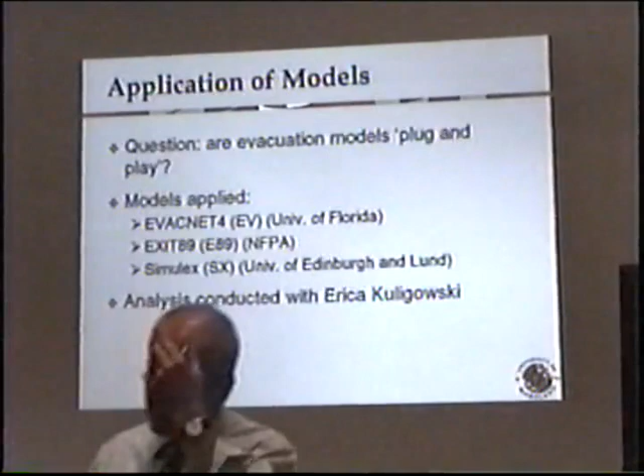What's it take to run these things? So we picked 3 models to run through this little exercise. We wanted to get a sense for, if you run these 3 models that are relatively popular in the evacuation modeling world that we had access to—that was an important constraint. We had access to them at the university with our very modest budget, so the free models were ones we liked a lot.

But otherwise, as you run these models, can you pretty much just run them with the default options, and for a generic, plain vanilla sort of building, get the same results? That was the interest we had. That's how it all started.

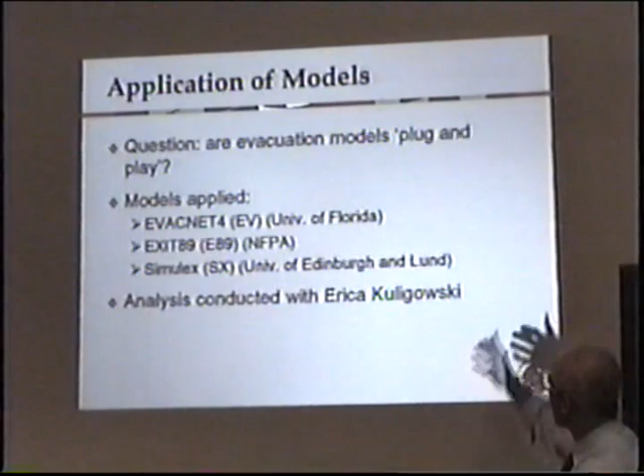The analysis—I'm talking about 'we,' and this is the faculty member talking about 'we,' meaning the grad student really did the work. I have to give her credit. Erica Kuligowski, she's at NIST—well, she's now at the University of Colorado pursuing a PhD, just finished her first year there, though she's kind of detailed from this to do that. So, with an interest in continuing in this area, basically.

We picked 3 models: EvacNet, this is the one developed with the NBS, at that time now NIST money, from the University of Florida.

EXIT89, it's a model that was developed at NFPA by Rita Fahy. The model's never seen the commercial world, I don't believe. It's still very much thought to be a research tool, as you talk to folks at NFPA, and they're very secretive about what their long-term ambitions are with this model. I'm not sure what their idea is. It's now been around for 17 years—it was developed in '89.

That's the name. And then Simulex is one of the models from the UK. There are 2 models from the UK that get a lot of press and discussion and coverage, Simulex being one of them. The other one, really the premier model I think at least in terms of capabilities, is called Exodus, or building Exodus if you apply it for buildings. I would love to apply this model, but that was well outside of our university budget to even touch.

So that was unfortunately not one we could deal with. So these are the 3 that we did. But let me give you a little background on each of these models, a little sense for what each of them does and how to work with them.

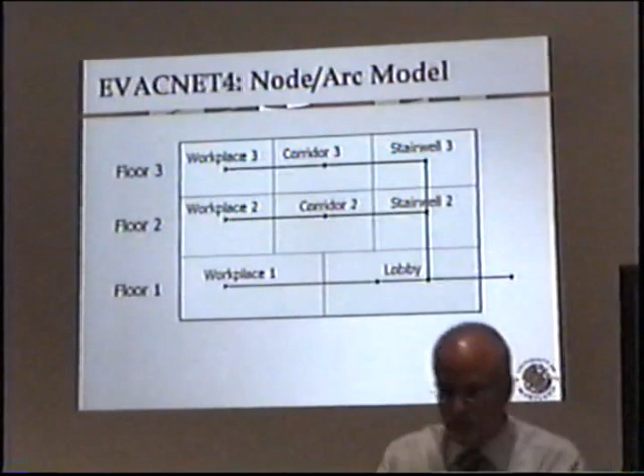We also came to appreciate the faculty don't have to be there either. For this class that just ended, we had 3 of the world's experts in life safety: Dave Purser, some of you know from the toxicity chapter in the SFPE handbook; John Bryan, one of the big names in human behavior; and Steve Gwynne, one of the principal developers of Building Exodus from the UK, though now in Denver. So 3 guys, one in Maryland, one in the UK, and one in Denver, teaching this class, with students principally all around North America.

About that, this is a node-arc sort of model, where you put a node in each space of interest where there may be people, and you connect the dots with arcs that are the pathways to get from one spot to another. It kind of looks like a sprinkler diagram in a way, and the mechanics of the science behind this is very similar to a sprinkler flow algorithm. In terms of getting the people, you're not going out the nodes, but people are starting at the nodes and ending down here at the exit—kind of a reverse flow of what you're used to in sprinklers.

You have some basic things to put in. You have to say for a particular node, how many people can you put in there—125, it says at the top of the door for this room, if this would be a node. How many people were there initially—32 or 3 of us, or whatever number we put in if we wanted to model this particular space. We also have to provide information about the arc, dealing with how wide that doorway is, mostly in terms of how many people can fit through it, and how long it takes to get from this node to a node out in the corridor. You have to go through some velocity calculations for that—how fast do people walk.

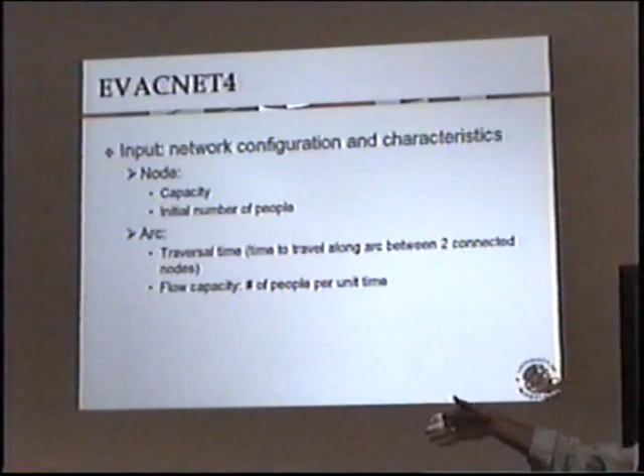Now, EvacNet, or EvacNet 4 in the current version, is an optimization model. An optimization model is something that either minimizes or maximizes something. There are a lot of optimization models used in engineering—not too many in fire, I guess, but a lot in engineering.

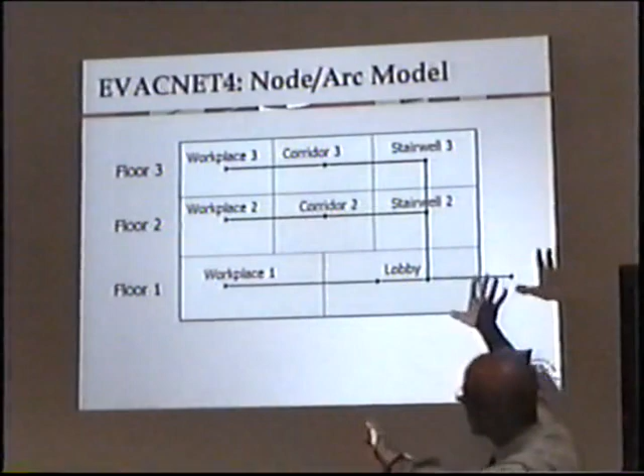EvacNet goes through—let me come back to this flow diagram. EvacNet is an optimization model, and it's going to split the people if there are choices on which way they go. Here there aren't a whole lot of choices, but if there are, some of us go this way, some go this way, and EvacNet will distribute us so as to minimize the evacuation time. That's what EvacNet does. Somebody was talking before dinner about doing evacuation plans for your facility, and EvacNet sometimes gets used for that—to identify the best route for everybody, kind of the thing you put on an elementary school wall: classroom 101, you should go that way, and 102, you should go that way, and so on. But it provides minimum evacuation time.

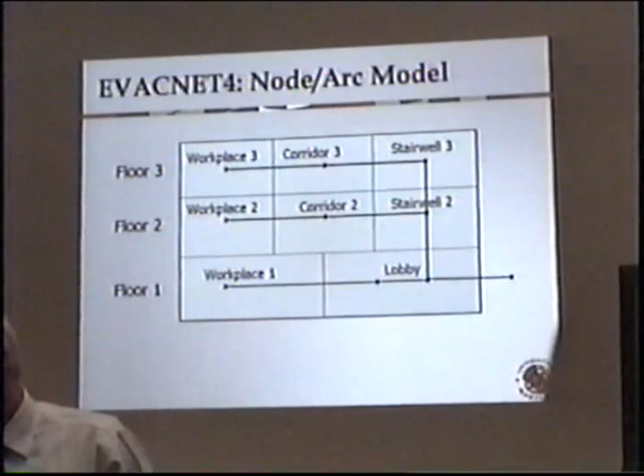Simulex. One nice thing about Simulex is it has a CAD interface, so it's relatively easy to put the input together. You can take your AutoCAD file from the architectural floor plans and bring that right into the evacuation model, and as such it gets called a fine grid sort of model. So you're not just putting a node here and a node there, but every square foot of floor space is basically being considered. We have to say something about the occupants and how fast they're going to walk, and with Simulex in particular, it deals with walking speeds in terms of how big the people are physically. Kind of an interesting style.

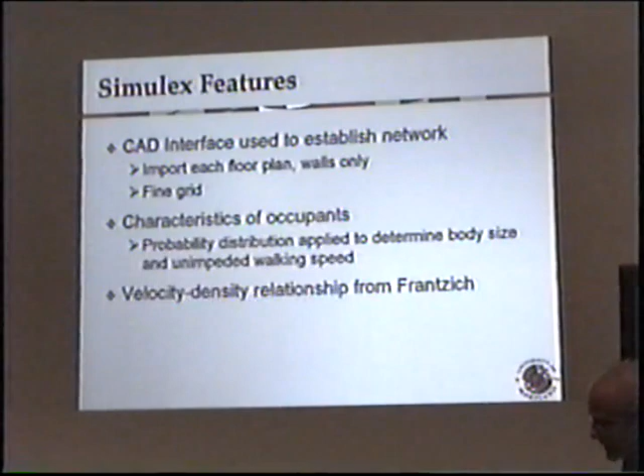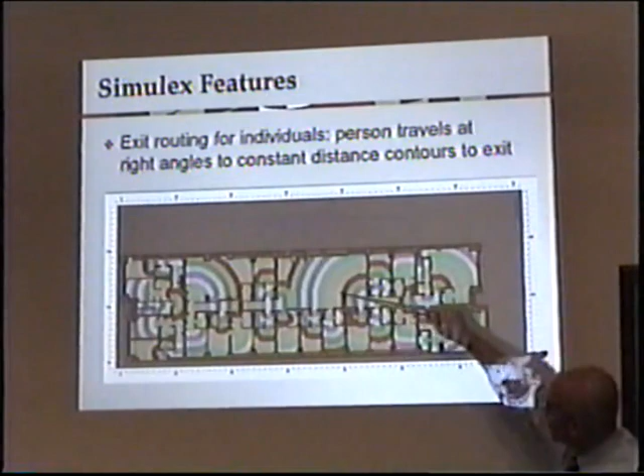And that gets more interesting with another model—there's a velocity-density relationship. They're all going to use velocity relationships about how fast people walk, and this one comes from a Swedish researcher, Frantzich, from Lund University, in a fire protection program. This is the input for Simulex, and one of the things it does is get people to the exit—it starts a person here, for example. These multicolored circles identify distances from a stairwell, radiating outward to show how far away you are from this stairwell or that one. The simulated person's objective is to walk perpendicular to these constant distance profiles to get to the exit.

So that's how that one works. Simulex, this is what it looks like when you run it. That's not for this building, but this is what it looks like. You can see the merging flows with people getting queued up at the doorway. They're coming down the stairway here.

Somewhat near the edges, but a bunch in the middle, much more than our research would suggest should be in the middle of the stair. But that's what it is. This is largely just a cattle run. The people aren't talking to one another, they're not thinking, they're not helping each other, and so on and so forth. Somebody gets stuck right there.

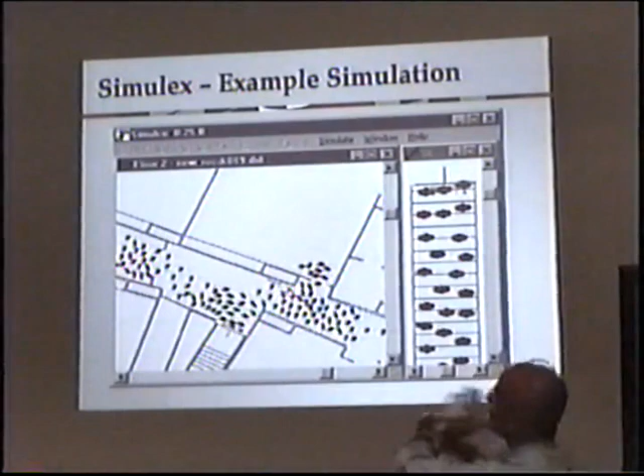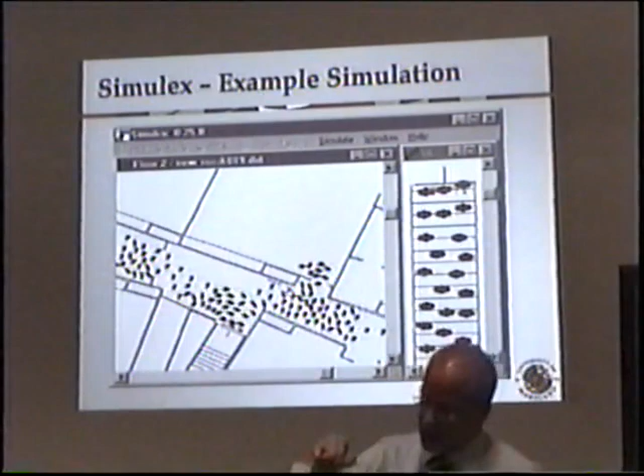When you look at the thing just in general, you say, hey, it's about right. It gets a little crazy when you watch an individual, though, with our simulations of the hotel I'm going to talk about. When we started the evacuation, there was somebody that started in the room, in the hotel room, went into the bathroom and bounced around the walls of the bathroom a little while, and then found the way out.

Right? Let's go beyond that. Now, can I ask a question?

Oh, please. In fact, yes, please do ask questions as we go along. Some of the things we've been hearing in the last couple of months have also been that some of the really big issues of firemen coming back up the stairs while people are evacuating. Can your models actually handle the counterflow of rescuers coming into the building while the other people evacuate?

In general, many of the models cannot. This Exit 89 can. It's one of the models that can do it. There's some work that's going on currently specifically trying to get some data on contraflows, post-9/11 curiosities and so on, but the EvacNet doesn't touch that. Simulex, I don't think, touches that either. But that's a very, very relevant question.

Exit 89, the input for it, it's a node and arc situation like the EvacNet. We don't have to do that one again. One of the interesting things is you have to put the body size of the individual in.

Glad you're asking questions, because otherwise we would have completely missed it. But, you know, how much has been in the news lately about the obese Americans? Right? And here we come out to be the smallest of the three. And say, well, the smallest person is going to now move the fastest because it's a less dense flow. Okay? So we're going to be the quickest because we're so thin and tough.

And so, you know, that's one of the points, though, that for a lot of U.S. consulting engineers, you're here doing this work, you say, we're doing this with American projects. That's clearly right, an American population, without thinking of the implications of that.

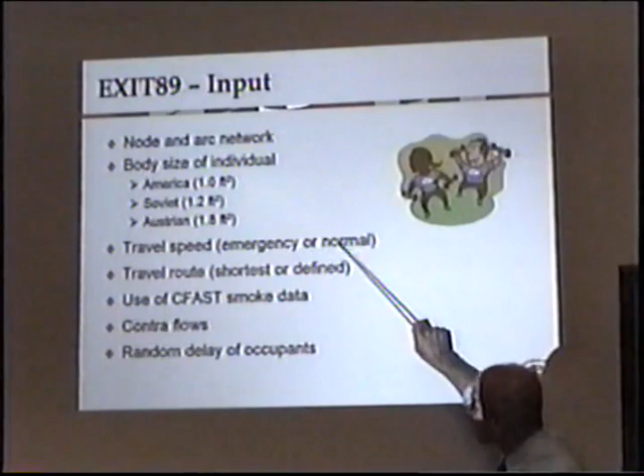Exit 89 also has the capability to run at a normal travel speed, so kind of a walking speed based on drills, fire drills, and so on. Emergency travel speeds are an increase of nominally 50%. This is based on some work that was done by a couple Soviet researchers back in the 70s that suggested there was this difference, though I don't know that it's ever been confirmed in any Western study, or any study after that, anywhere.

This one does allow you to bring in some smoke data from CFAST, for example. That it's smoky, it's hot, it's whatever that maybe causes some issues.

All right. The building we looked at, and all in the name of, let's do something simple and see what differences we get. Let's not look at the most convoluted building ever, where you almost surely are going to get some difference. So I thought, let's just do a simple hotel building. Double-loaded corridor kind of situation, straight shot corridor kind of deal, stairs nominally at either end, and that's all there is to it. So that's what we worked with.

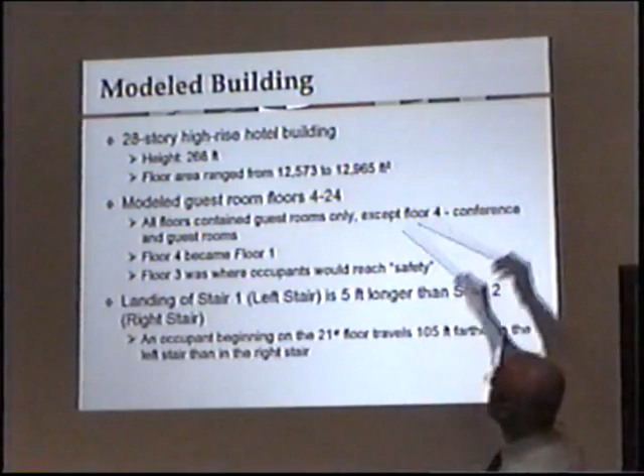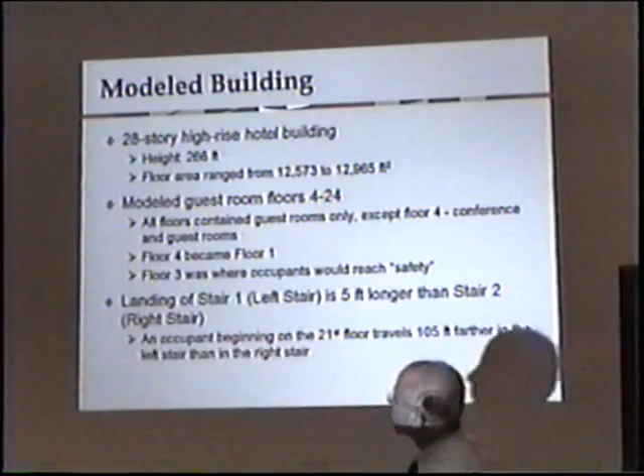The building itself is a 28-story building. You can see the details of it. Now, we only modeled floors 4 to 24, and floors 1, 2, 3 have a lot of ballrooms, rooms like we're in now, that would involve a lot of complications. We didn't want to get into the complications. Let's do the plain vanilla building. So once the people got to floor 3, they were presumed safe for the purposes of our analysis.

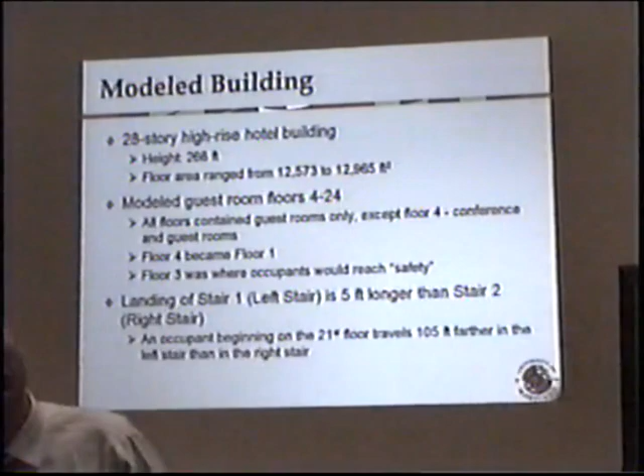One of the quirks of this building is interesting. We tried to get a plain vanilla building, but when we got the actual file from an AutoCAD drawing of an actual hotel that fit this, we found the landing on one stair is a little bigger than the other, so you end up with a little longer travel. Anybody who goes in will see a left-hand stair in the drawing, so someone starting at the top will travel over 100 feet compared to someone running down the right-hand stair. Just a little trivial fact, tuck that away for now.

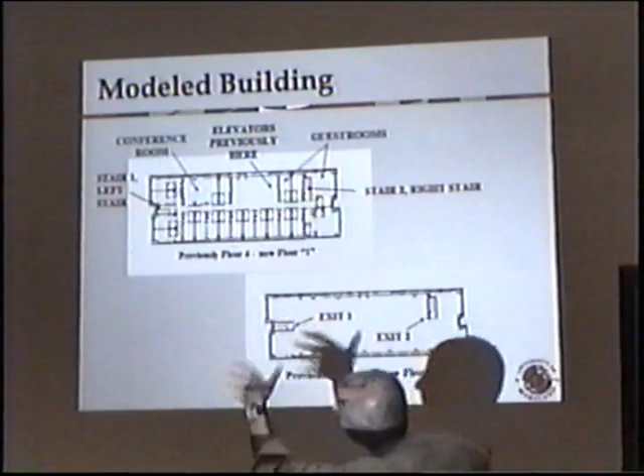This is the building we had floor plans for, from a major hotel chain - I shouldn't mention who in particular. So this is the hotel, right? We had to adapt it a little because we don't want people evacuating down elevators or elevator shafts, as that skews the evacuation times a lot.

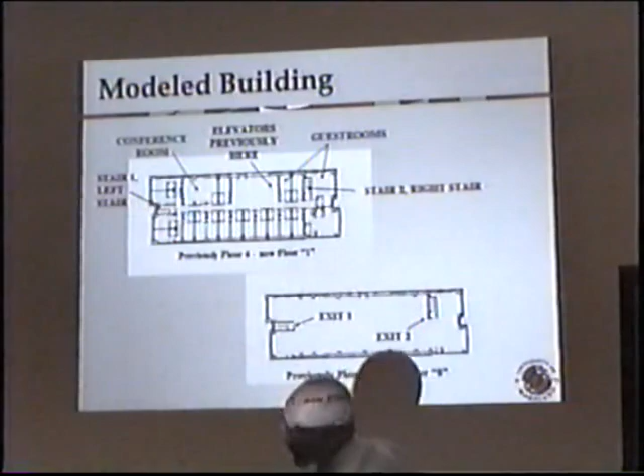There was a conference room, and we went back and forth, and decided we'll leave the conference room in. Otherwise you can see a couple exits - here are the stairs, here and here. Nominally at either end, these are a couple of suites sort of thing you hear about people having. At State University, you never see those. Anyway, probably mostly all suites.

This is the grouping. We put a number of people in the rooms to try and simulate more or less full occupancy of the place, and go from there. So no big parties anywhere in particular - we debated that, putting 20 people in one room.

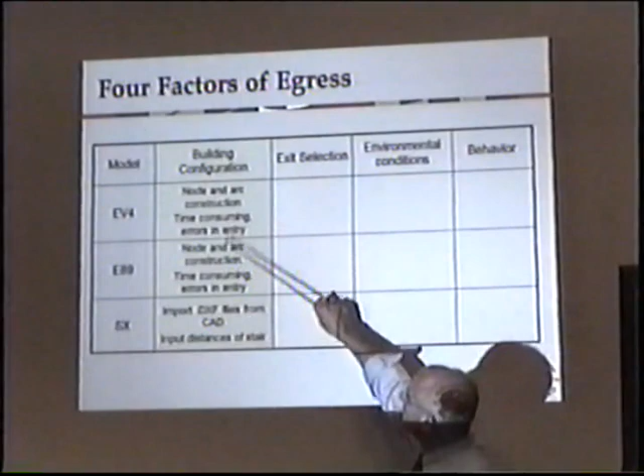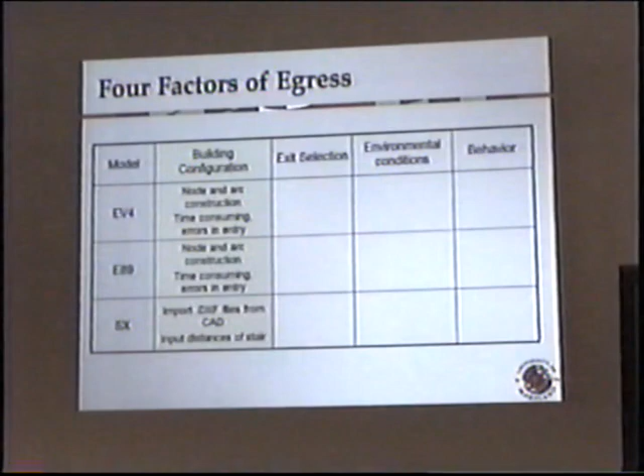Let's talk a little about how these different models compare. We've already said some things about this node and arc kind of stuff, and this is all manual at this point - they enter those, and as Erica mentioned to me, as a student working through our classes, it's time-consuming to put that data file together for these couple models. It's very nice to have Simulex allow for CAD input, so you don't have to do anything other than provide distances, vertical distances on stairs. Basically that's all the extra stuff you need, so it's very straightforward to do the input.

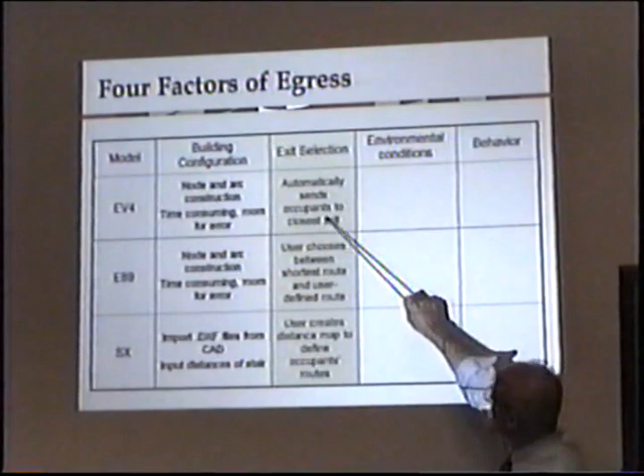How do you do exit selection? Well, EVACNET was the optimization model, so it automatically sorts people to maybe the closest exit, but the exit that optimizes, minimizes the evacuation time. In Exit89, the user can choose between the shortest route that the model works with, or you can say for these people in this room, I want them out this stair - to force the issue, to block a stair maybe. You have to go through those sort of things as you might in a fire.

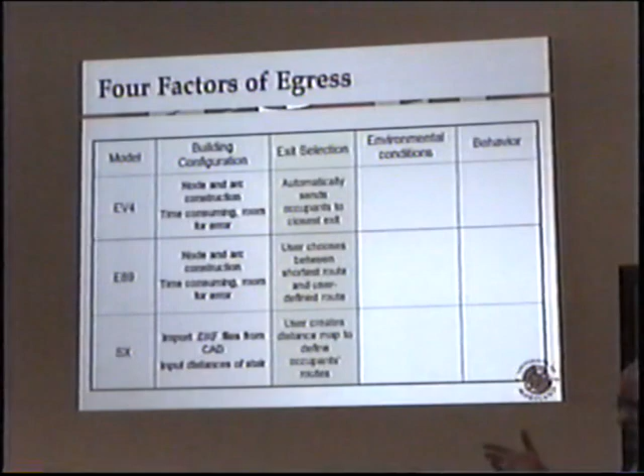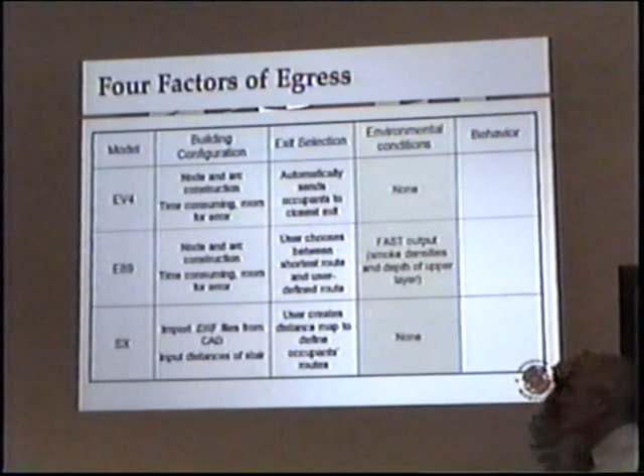And then finally, Simulex - we saw that distance map with the psychedelic color sort of thing. Environmental conditions, meaning is there any smoke and fire simulation in these models? The two of them did not have any of that, as I mentioned. Exit89 has the capability, though, to do apples and apples comparisons - we didn't do any fire modeling for this analysis. There's 25 or so models that exist. I'd estimate there are probably four or five, maybe six of them that do some sort of fire input to the evacuation model. Exodus, the big name model, does fire modeling or has that capability.

And then finally, behavior - what sort of behavioral issues are involved? Very modestly involved here. EVACNET really has no behavior in the way human behavior studies mean it - you have to provide travel speeds, we're accounting for people movement, but not so much what they're going to do. There's also body size - Exit89 with Austrian, Soviet, American populations, kind of things you have to say what population you have, and that deals with velocities.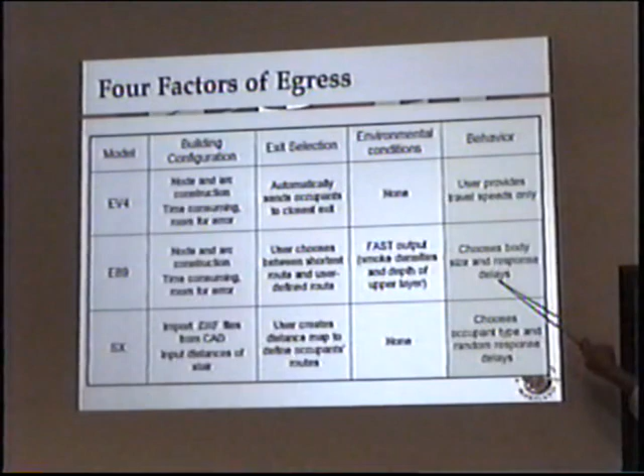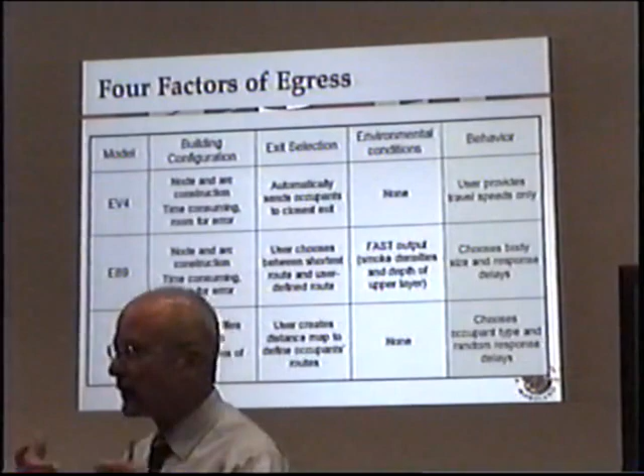You can also include pre-movement time here. If there are pre-movement times, that can be incorporated, and different pre-movement times for different people can be done in Exit89. Finally, occupant types - something I didn't mention - you can do adults, male, female, children, elderly, to deal with different mobility characteristics, and also do some pre-movement delays in Simulex. But no real behaviors - we think of human behavior, decision making, like let's go wait for a relative, or let's go wait for a coworker, let me go see if the kids have gotten up. That's not in any of these models.

All right, so the results we got - I want to say what we ended up doing. We compared the overall evacuation times for these different models, and tried a couple different variations in the way of changing the movement speeds of the people, using different correlations by Pauls and Fruin, names in evacuation studies that have gone on through the years. Jake Pauls, Canadian, did a lot of work in the 70s, authored the SFPE handbook chapters in the first couple editions with a lot of his work.

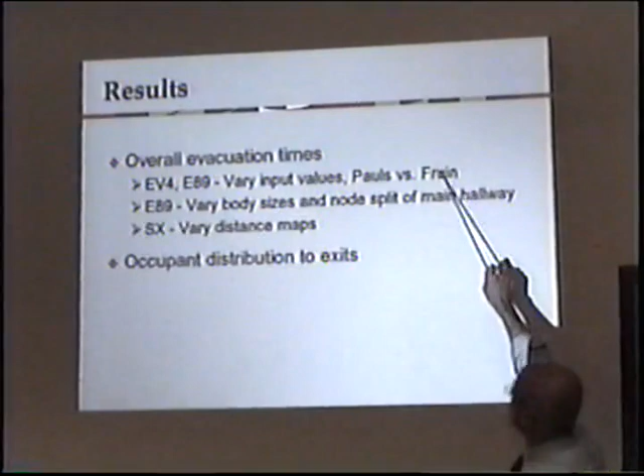John Fruin from New York, who's really the first premier American researcher in this area.

We did some body size changes, so let's look at Austrians and Soviets, not just Americans, and changed how people would go left or right for the stairs to force that. We did some distance map changes, and then also, in addition to looking at evacuation times, looked at how they split in different stairs.

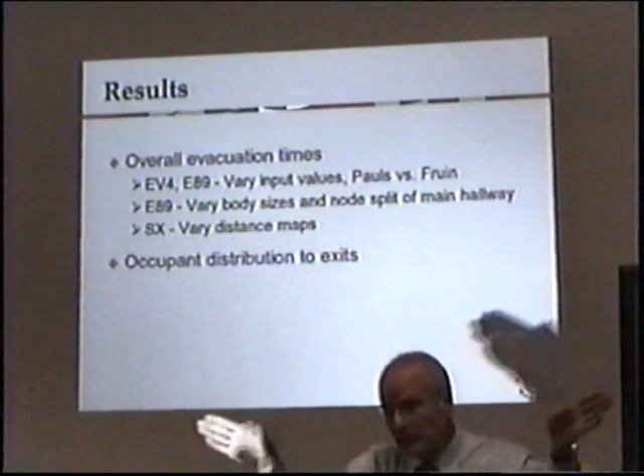I have a question. In these models, are you assuming that everybody gets the alarm at the same time? Yes. Right, do you take into account whether or not—the data has shown in some studies that

voice evacuation will prompt certain responses versus other alarm type signals? I know we've used that lead-lag regression model, and we take into account the delay factor, maybe using those important messages versus just a general alarm. Not specifically, but certainly,

we did vary those pre-movement times that you could suggest—why was that? Well, it may have been a different alarm system.

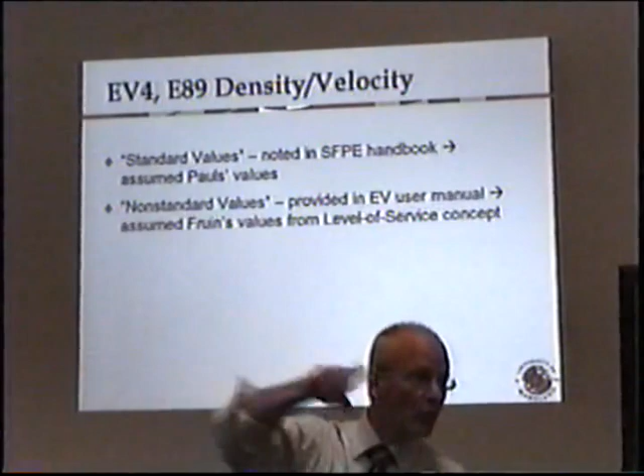There are a couple different velocity values we use, and some of it we might think to be standard because they've appeared in the SFPE handbook. So we use some of those, and I'll show you a graph of that in a moment. There are some non-standard values we use as well. That's Fruin stuff that I've mentioned here though. I mentioned Fruin a couple of times because if you get EVACNET, the free model, Google EVACNET, it'll pop up, download it, and so on. Their default values for movement speeds are all based on Fruin's information.

I guess in the days before the SFPE handbook is probably why that's so, and they've just never revised the model. The SFPE handbook values we picked were densities of 5 square feet a person. That puts you here for speeds, or here for the flows going through doorways—so almost optimum conditions going through the doorway that we picked to try and get a best case flow characteristic. We knew we were getting there with that. Speed-wise, to use the same density though, we had to be here, which if you're in a freewheeling sort of thing and running by the exit with the crowd, you're going to not be all the way at peak speed.

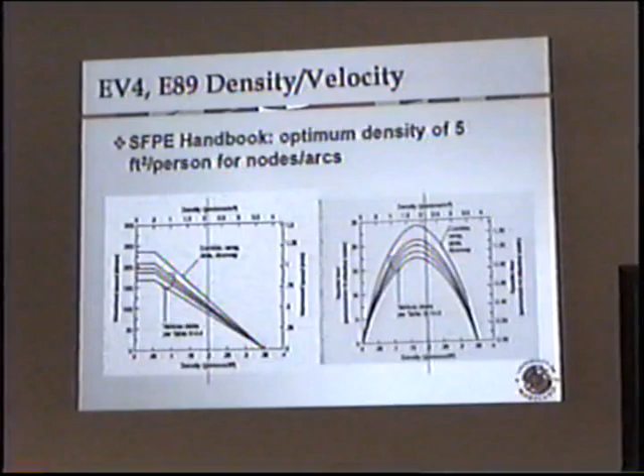Okay, so we've got these couple of things that we've done from the handbook. And we could have done, and we could still be doing this analysis by doing a range of different densities, and that's the next grad student, I guess.

Fruin—one interesting thing about Fruin, if you pick up the EVACNET user's guide, it actually shows you pictures based on his level of service. So you can kind of say, yeah, crowd flow that I've been in recently, leaving a hockey game or whatever, it was kind of like this. You can kind of visualize that. It makes it nice, especially as you have to try and relate that to architects.

There weren't any architects here, right? Good. Just allow this free range of jokes in.

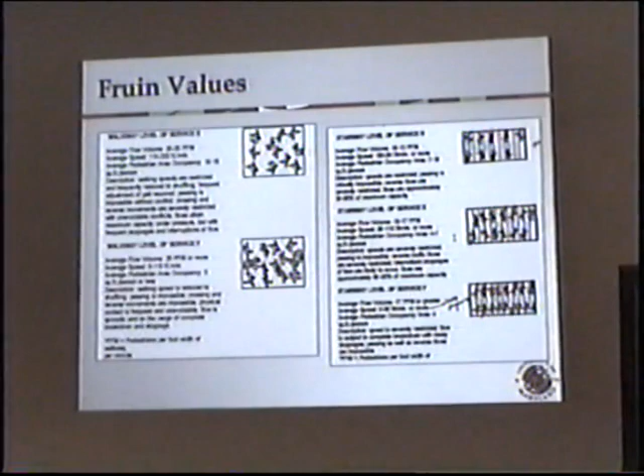Okay, so with the levels of service, we were in level of service E, to try and get close to that same— with this 4 to 7 square feet a person, we picked 5 for the handbook values to try and be somewhat consistent.

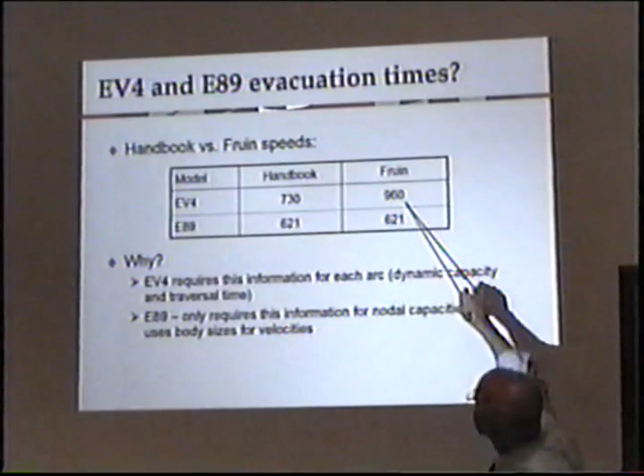All right, so when you use these, what sort of evacuation times do you get? With EVACNET, using the handbook values, SFPE handbook from Paul's, you get evacuation time for the building—how long does it take to totally evacuate the place? So we didn't do any phased evacuation, it was a total evacuation, everybody all at once. 12 minutes, here's 16, all right, just running the default values. Just let them run, just simply kind of group, blindly throw the times together.

Exit89 sets its own velocity, so it doesn't care about any of this—it's setting its own, and it's down here at 621. Right away you start to get a feeling for, hey, you just throw these models together and that's a difference of 50%—a difference of 50% right there, without trying to, which is also one of the bigger ranges we got.

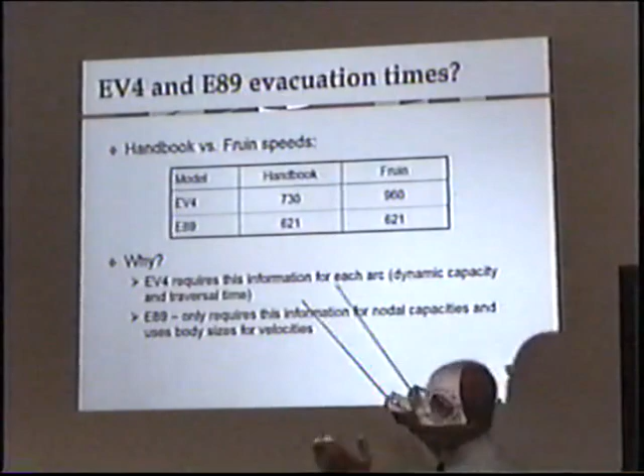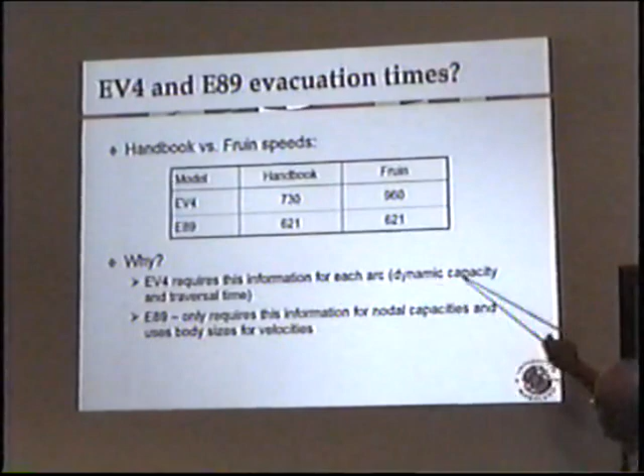Now there are some issues here. EVACNET requires this sort of speed information for it to travel along every arc to determine how long it takes to go from here to that next room over, kind of thing. So it's very dependent. As I say, Exit89 has it all embedded inside the program, so it doesn't care what sort of numbers you're thinking about. When I did it again.

Oh, this is right. That's right. Finally, all right. Now let's go to 6.

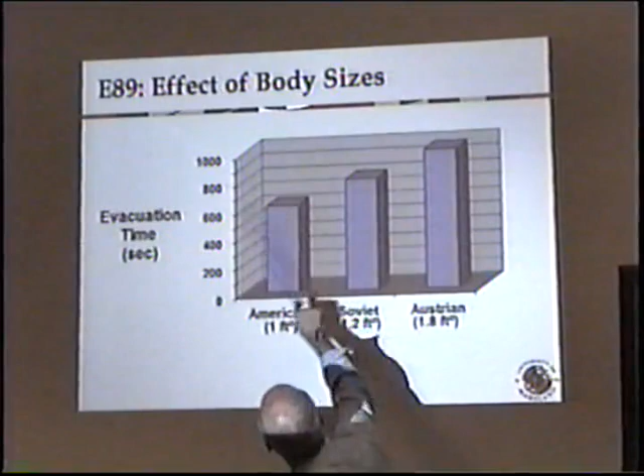This is how body size plays a role in exit 89. About 800 seconds, 600 seconds for the American, the 621 I showed you on the previous slide. American, 621. The Soviets are up here at a little over 800, and the Austrians are up over 900 seconds. Just by changing that body size, it changes their velocity.

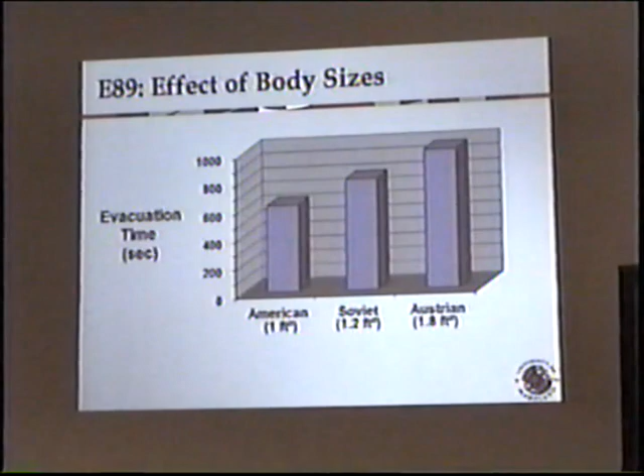The American, Soviet, Austrian, again, those are just labels, right? Just labels, or how big is into it. This square foot, what is that square foot? If I took a shadow of how much room I take, with a bright light shining down on me, that's how much room I would take up.

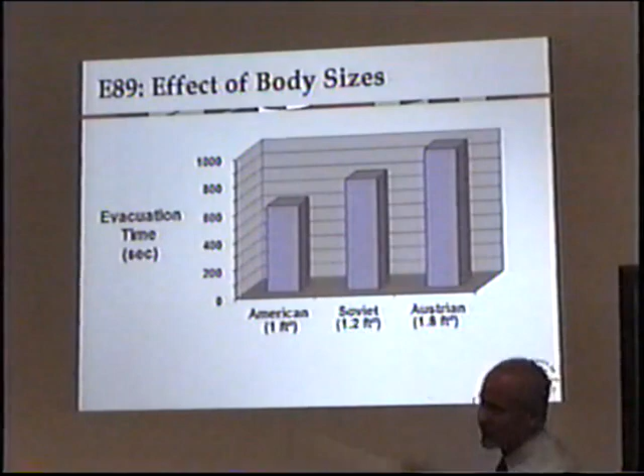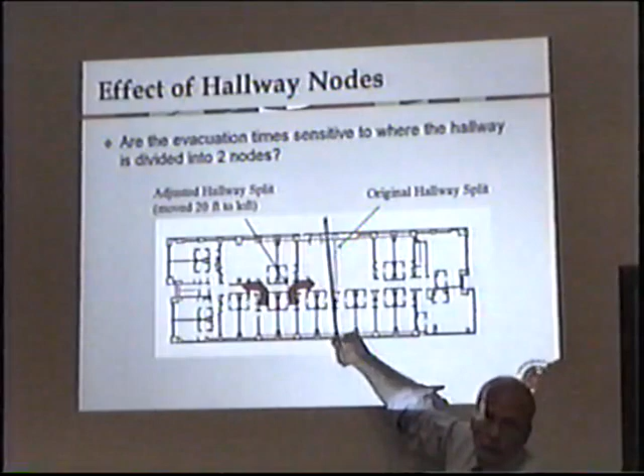It doesn't make a difference as to how I connect all the rooms together in this nodal network sort of diagram. We started it, let's do it right down the middle, kind of default case. We got some answers there, and we ended up sliding it a little bit to the left to see what impact that would make, and I'll show you what we did there.

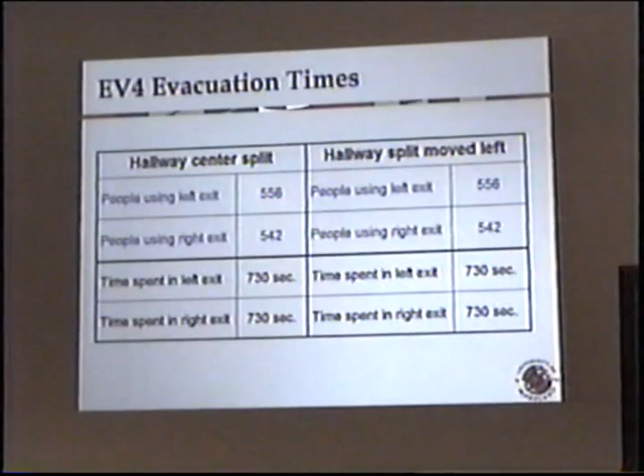When we compare, first of all, EVACNET, it doesn't care where you split the hallway, because it's doing optimization. And again, that's just a reflection of the EVACNET, as much as it's a very trivial result. You're getting this optimization, you're getting an almost even split of the people in the two stairs, 556 people in the one stair, 542 in the other, to optimize the evacuation time so that you get the same exact evacuation time using either stair. That's the aim of that model.

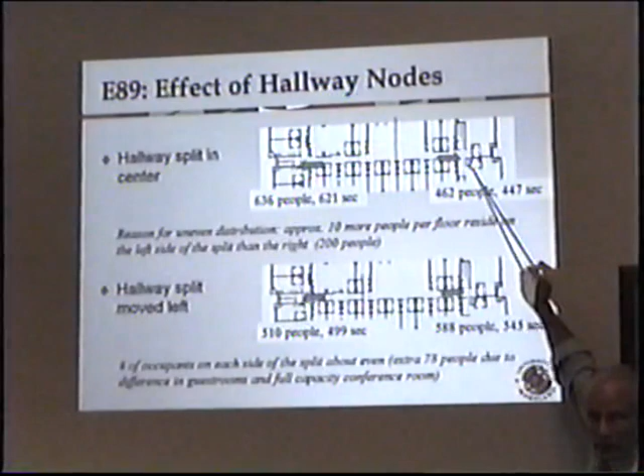12 minutes. With EXIT89, when we ran it the first time, just put it right in the middle, we had 636 people going this way, 462 going that way. They said, holy smokes, what's going on, that there are so many people. Now there's a conference room on one floor for 50 people, but that's not going to give you 170 people. It makes a big difference in terms of the evacuation times.

So now you're starting to say, how I put the input together affects the output. Well, at that point you say, duh, that's a lot of modeling does that, right? The output's dependent on the input. And we were seeing it here in a way that we didn't expect to be quite as emphatic, anywhere near this emphatic.

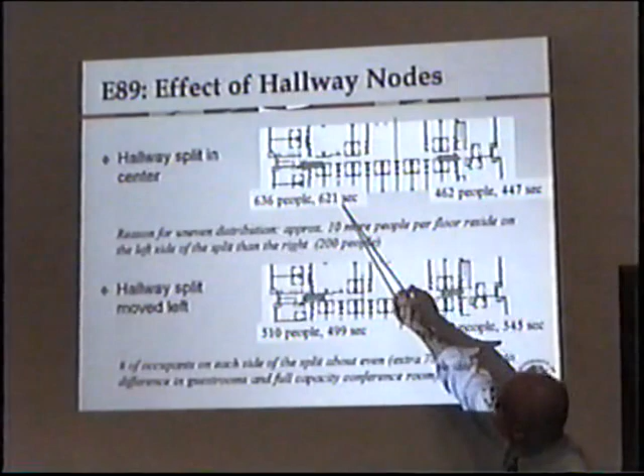When we moved the split, we ended up getting a more equal distribution here at a lower evacuation time as well. What's the evacuation time of the whole split here? Well, you take the bigger of the two, 621. And I can reduce the evacuation time artificially just by changing that nodal network by a little over a minute.

By clever engineering, some would say. Not that there are engineering firms who would do that sort of optimization. I'm sure they're clever. They want a license next year.

Right, and that's the bottom line to the whole evening discussion. So I'm done. I won't charge you for it. But that's the key to it, right? That's the key to it.

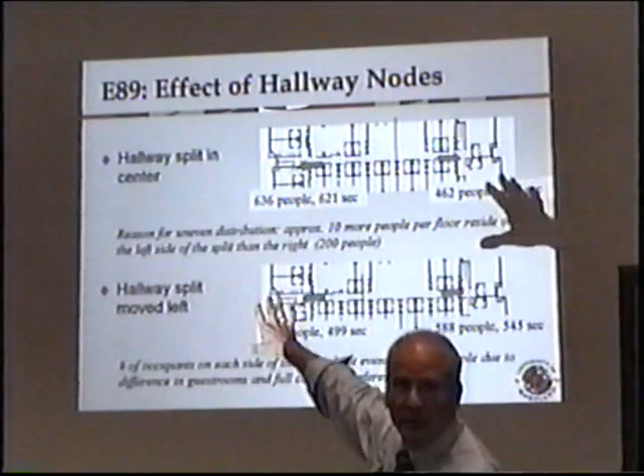These are not just plug-and-play models any more than there is any other fire protection model. We have to document our assumptions and so on. And it was just interesting how you could do some little adjustments here to these models as it is.

And we go through one other one with Simulex. We move those around in the same sort of way. We block the stair from some of the occupants, not all of them, in one case, to try to encourage more of them, because again, we were getting an unequal flow to the two, where the occupants, in the case of Simulex, were going more to the right stair, if I remember right.

With the first distance map, DM1, just letting Simulex put its own distance map together in the psychedelic color diagram, we found there were almost 100 extra people using the right exit. Simulex does that because it knows the one stair is a little shorter than the other, considering that landing difference. Now, as you go into a stairway, do you know this one's 5 feet shorter per floor and I ought to go that way? Of course not. That's not how we select exits. But Simulex knows that.

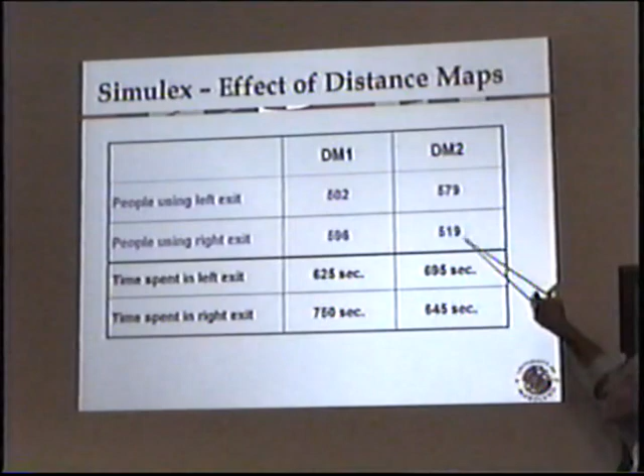And that's when we move things around a little bit to try to get a flow that was a little more equal, without really going into a convoluted way to do that, and get more of an equal evac time for the two stairs.

When you put it all together, these are the sort of range numbers we went through with some fairly simple calculations. Now, there isn't any actual fire drill data, unfortunately, or real evacuation data for this particular hotel.

So unfortunately, we don't have any of that to use as a baseline. If you use what's in the SFPE handbook, the setup in there, the current edition is by Mowrer and Nelson. Perhaps some of you have used some of the hand calculations for stair evac times. You get along with 12 minutes. So that's somewhere right about here, kind of mid-range for the range on there.

But you can get down with the American population and moving that split at Exit89, as we talked about, into a little over 500 seconds. And you can get almost up to 1,000 if you use those heavy Austrians, beer drinkers, and so on, too many Oktoberfest.

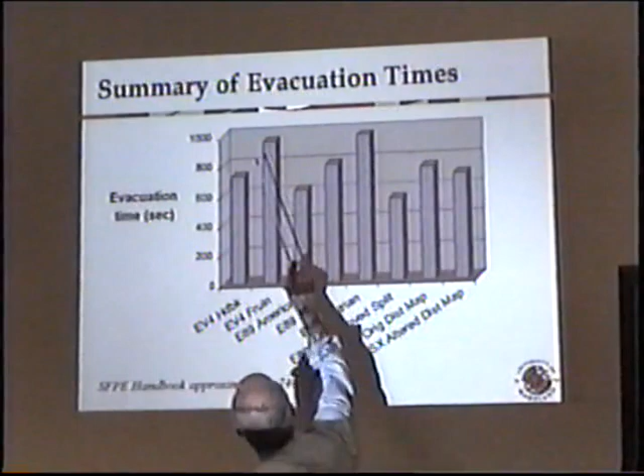And as Mike has already properly said, the key to this, as in any other model, is you've got to document the assumptions: what are we assuming the people to do, when do they start to move.

I remember doing a couple of years ago a third-party review for, I think it was a mall. And I found myself reading these evacuation counts, and the people were moving as soon as the matches dropped. How did they know that, three stories away from the store and so on? So you get into those kind of blatant issues, let alone some of these other tougher issues.

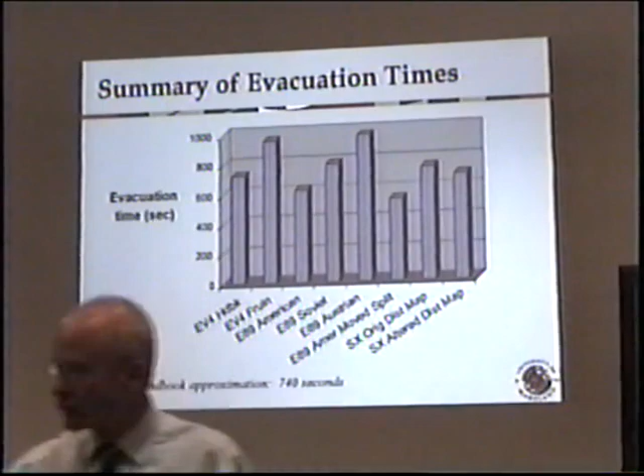What sort of velocities are being assumed? What sort— let me come back. What sort of densities are being assumed? How crowded is the flow going to be? That's going to make a big difference.

Again, all of our analysis was done here. It would be very interesting to just do a sensitivity analysis of these models with the range of densities you might get in an evacuation, at the very least. Anyway, questions from the group of any sort about it?

Question: do any of the models do any kind of Monte Carlo simulation, where they build in all these variables, run a bunch of range variables, and come up with a distribution?

Right, there are—Simulex does do some random distribution of the delay times, for example. The Building Exodus model does some random variables for some of the human behavior aspects. So there are some of them that do that. Exit89 and EvacNet, though, the other two, are completely deterministic, and they give you the same result every time.

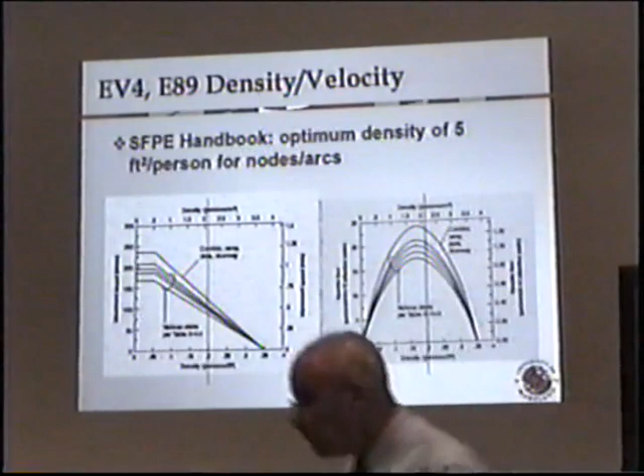So, is there a model, or two or three, that are considered to be better than others in terms of accuracy, effectiveness, and coming up with the right answers, so to speak? Another piece to that question would be: are there certain models that would be considered more credible with code officials and people approving buildings to be built in their jurisdiction, by name of the model?

Well, I used the EVAC model.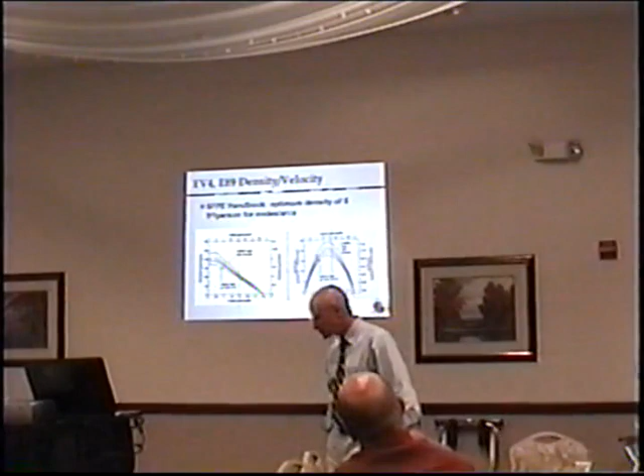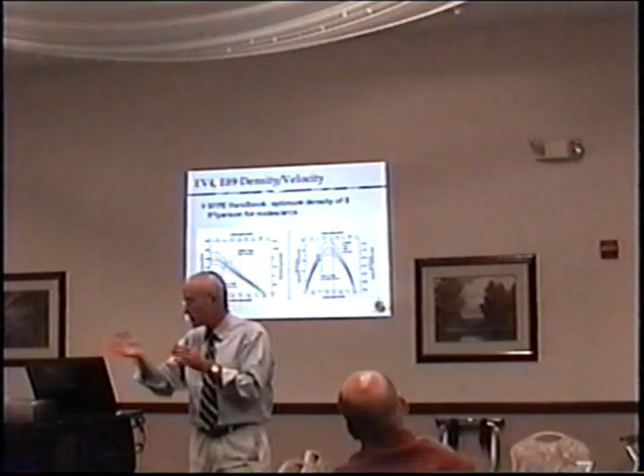Short answer, not that I know of. I mean, is there any model that's kind of gotten a de facto approval? I don't know that there's any model that has that de facto approval. A lot of these are being used, I understand. Mike, you talked about using one, and the folks at Hughes do some back modeling. Arup has their own model that they run, and I think RJA has a model of sorts as well. Apparently they're using these models successfully. Simulex is used by a consulting company. So I know some of these are being used successfully, at least in that commercial market.

I think, as Mike has already alluded to, how you judge these in a good, better, best sort of thing depends very much on what you're trying to do with them. I think that's the bottom line.

If you want to put an evacuation plan together for a high-rise building or a school, the EvacNet model is an optimization model. It's going to give you the best case answer, sort of thing. Although with some variations, you can get a better best, as I showed you here, or a not so best answer, depending on who you look at. But it has some of that for a design application in a conservative sort of arena.

I'd have some issues with EvacNet. How do you use EvacNet to get you the best case answer when we usually are dealing with a worst case environment, a lot of our fire protection design? You can pessimize a lot of the inputs to kind of get there in a way, but it's still giving you the best case for the worst case input.

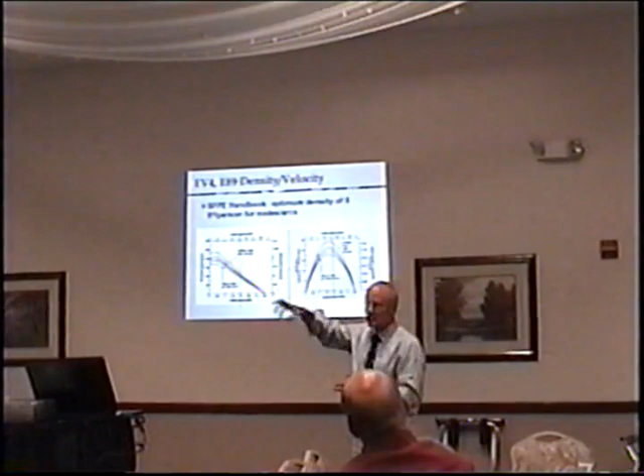I showed you the Simulex animation, it's pretty crude. Arup, I think, is kind of a 3D sort of simulation where you see the people. Building Exodus is also 3D, you see the people walking about and so on. The other ones I don't know. There may be some very good animations for the others I haven't seen.

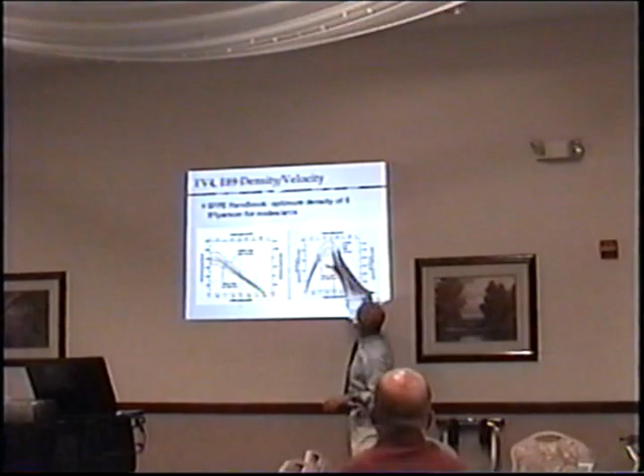One of the other points I want to bring up in terms of conservative input, what's conservative in one application may not be conservative in another. Providing this density here, for example, gives you pretty good flow characteristics. You're optimizing the flow out of a doorway. And if your evacuation is driven by going through a doorway, and that's the constraint to the evacuation time, then best case flows are going to give you best case answers.

If your evac times are dictated mostly by how long it takes to run down a long tunnel, then, and I use this, that would have been pessimized a fair amount because I'm not using a peak velocity. I'm down here at lower velocities. So what's a best case situation could even vary depending on what's going to be the dictating factor.

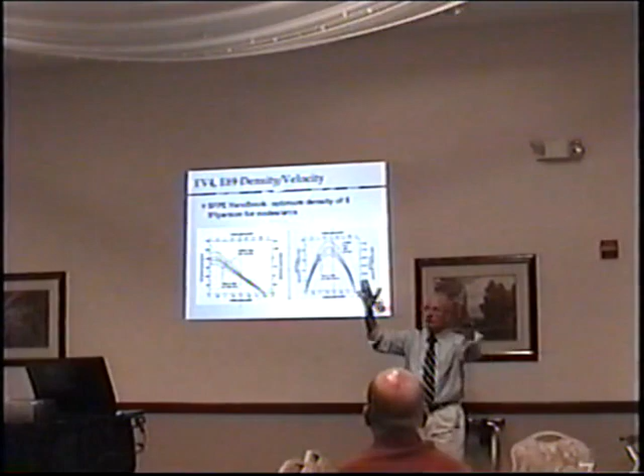And I don't think there are many people with a good enough feeling of any of that at this point that can say that just intuitively. I think you've almost got to run these models a few different times and see, and kind of do your own sensitivity analysis. Have I made the conservative assumptions? For sure. And in another few years, I think we'll get the experience base. We'll know that at this point.

But don't you have to be conservative just because of human behavior? If I step out of a room, I know there's things here and here - that one's flowing, that one's backed up. If I'm down there, but I'm going that way. Right, that's right. Absolutely.

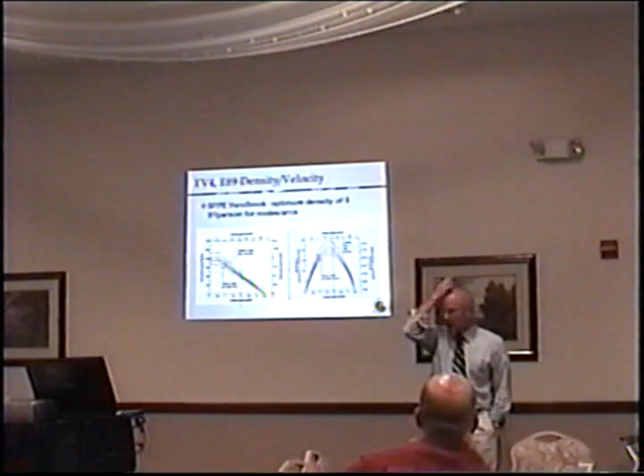Yeah, these models don't do much in the way of human behavior. We're doing a random delay, which gives you a little pre-movement time, but the bulk of the evacuation models, other than Building Exodus, don't allow for any consideration. Well, there was the old EXIT model from NIST that was kind of an early attempt at things.

But otherwise, these models don't account for the fact that - what's your first action when the bell goes off? Roll over. Or if you're in your home, you go look for this thing, right? Because you just got an elbow in the side, sort of, alright I'll go look for it. And you go look for it for a while. None of the models deal with that.

We took those into effect because it's so unpredictable. I think that's the biggest challenge we have with some of this - since we don't have a grasp on human behavior in a reliable fashion, what can we just build in as conservative factors of safety? It's unknown. And if a guy's going to stand there and watch the fire, it's still probably a theory of evolution.

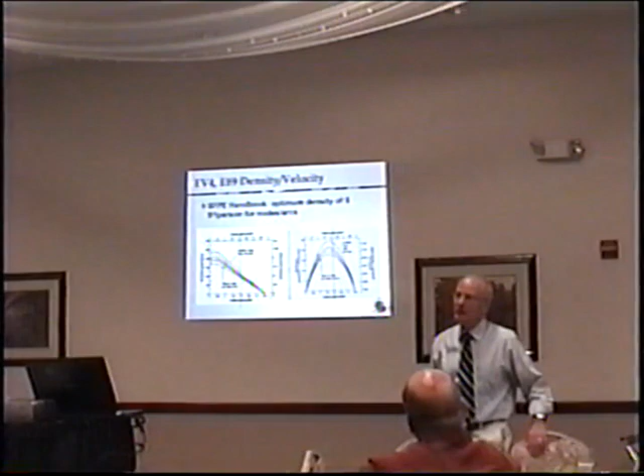I was wondering, have they done any testing or anything with the actual data? Because it seems like you're kind of remiss when you don't take into account that human behavior factor.

The bulk of the comparisons to date that have been done have been relative to fire drill stuff. Building Exodus, I keep mentioning - I didn't do the actual runs of them - but there are a series of papers that compared them to drills, for example.

Now with World Trade Center, there has been some evacuation modeling comparing models - I think again it was Exodus - against the evacuation of the towers, and there were some estimates of timelines there. But you bring up a good point in that there's relatively little comparison at this point available to actual fire data as it is.

Even this information that we have here is from drills, for example. And how fast we move in a drill - how do you compare that to how fast we're going to move in an actual emergency incident? That again brings in those factors of safety that are going to have to be applied.

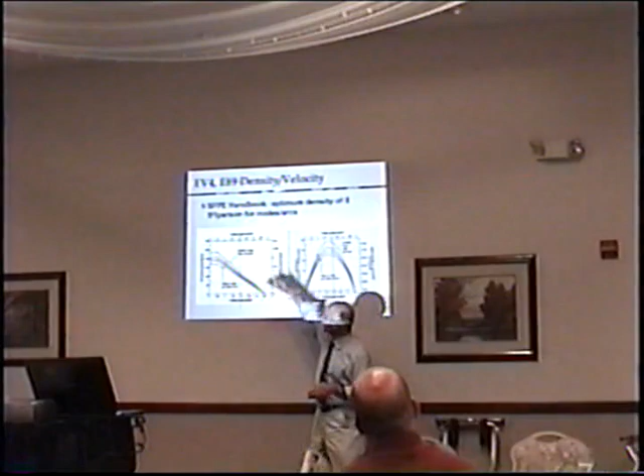Either way, you can argue it's plus and minus, right? In terms of these speeds - are they going to be faster than that because we're more motivated, or slower than that because it's chaotic and smoky and noisy and so on and so forth?

What do any of these models do about disabled people, and the fact that they have - leave them behind? Simulex allows you to derate the velocity of select people, so that can happen.

And some of the animations that we saw with Simulex, it does create a logjam - in one simulation of this that we saw, which I didn't report on here at all, you really see the people stacked up behind the wheelchair in that particular application, or behind the disabled person being helped out.

Would you use that same theory then on the models for staged evacuation? Where you're evacuating 3 floors, people are staying in place? Right, yes indeed, you could very much do that.

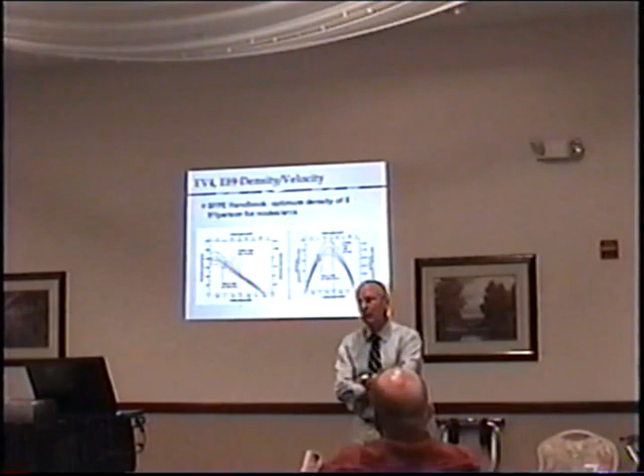There was a student that followed Erica here, in fact, that did some of that in a master's thesis - doing some phased evacuations with different sized buildings. We were hoping to see if we could justify a particular size or height building when phased evacuation was clearly preferable to total evacuation, and we didn't find that clear line, I'll tell you, that I was anticipating. But you can certainly use these models to look at different evacuation strategies, yes.

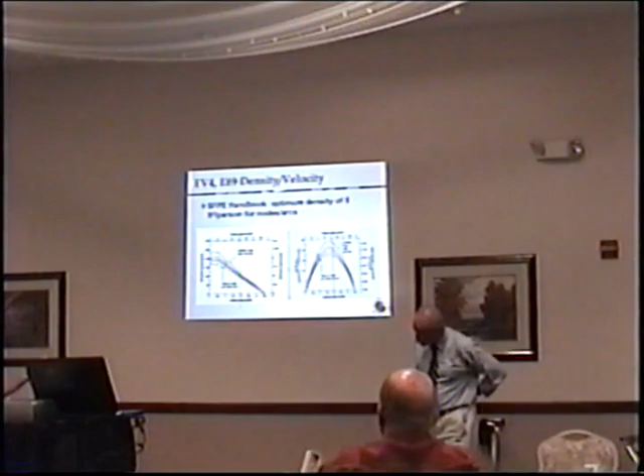I guess it raises even more questions for me. A couple of thoughts come to mind: it appears that some of these models are fairly old, relatively old, not recent. I'm asking myself, who's paying for the extra research to come up with new programs? With faster computers, are there programs actually better than some of the older ones, and are they free? Thinking of how Google is exploding as an example, there's not that large a community out there to really pay for this research, other than government. So where is this going to? How long before we get a model we can download and work on without knowing all the ins and outs, but still get a reasonable answer? Where is this all heading?

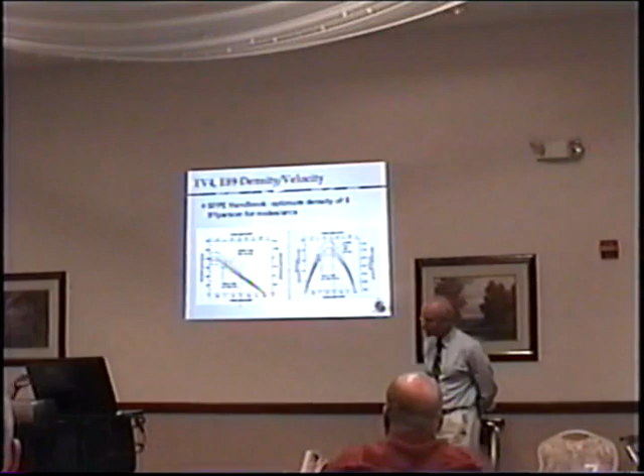I'm just thinking that as fire protection codes have gone from guesswork to full-scale fire tests, not everything, but slowly and surely it's getting there. That's taken 20, 25 years or longer. Where is this heading, and who's going to pay for it?

Sorry. We've got all night. That's the best, I'll stay behind for the answer. Yeah, that's the way to do alcoholic beverages, I think.

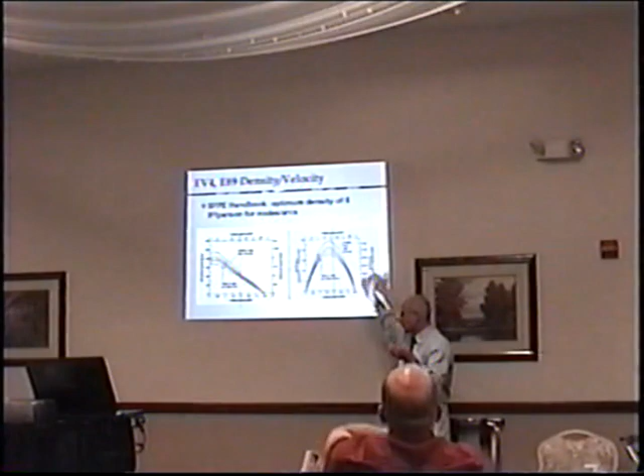A couple of the models that are fairly dated were developed here in the U.S., the ones I mentioned. A couple of the newer developments, Simulex and Exodus, are both in the UK. It's kind of interesting that they're both offshore. Exodus, I know, is being aggressively updated and expanded, with different subroutines looked at compared to any data they can find, including drill data, looking for those calibrations. There's a group at Edinburgh still distributing the Simulex code. I assume they're doing things to expand it, but I don't know the detail. Otherwise here in the U.S., it's kind of interesting.

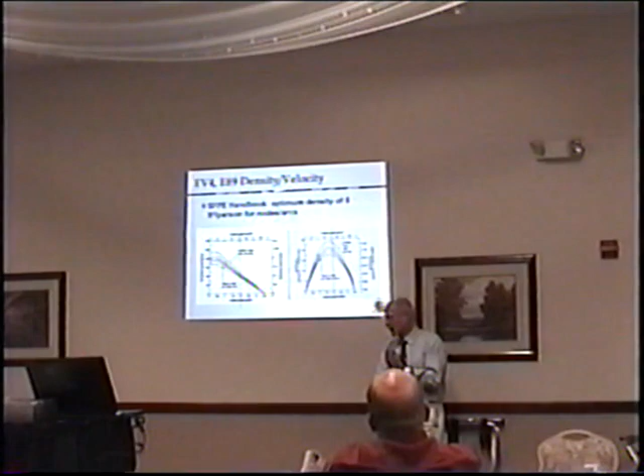A lot of our modeling has come from NIST. NIST supported the evacuation model 20-some years ago, and supported human behavior research 25 years ago. Basically it's been pretty much removed from the area, although certainly post-9/11 they've had people looking at evacuation studies. Bill Grosshandler, head of the fire lab at NIST, this week commented that human behavior and evacuation is a primary area of interest for NIST now. Does that translate to dollars to develop a new model? I don't know, I have no idea what's on his plate. I know folks at NIST have been using some of the existing models, but whether they'll just use those or develop a joint relationship, I have no idea. It's going to take a long time before we get some. Could be another 20 years, I guess.

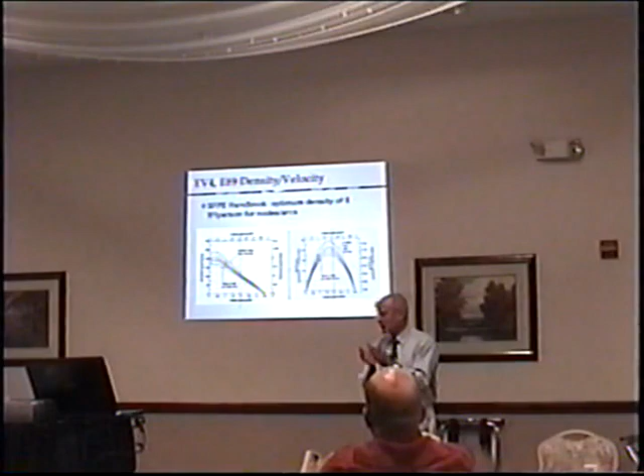Well, then again, I think the modeling capability, as in so many areas of our field, is there. The numerics is there, the math equations are there. But do you believe any of the output that comes out? Is it any different than playing PlayStation and just getting nice graphics? That's where calibration is required to be able to believe what the thing's telling you, either by running it several times to understand the quirks, or by getting calibration data to really get these things to a point where we can understand them, believe them, and trust they're credible.

Anybody else? Any more questions? Everybody looks to be going home, I think.